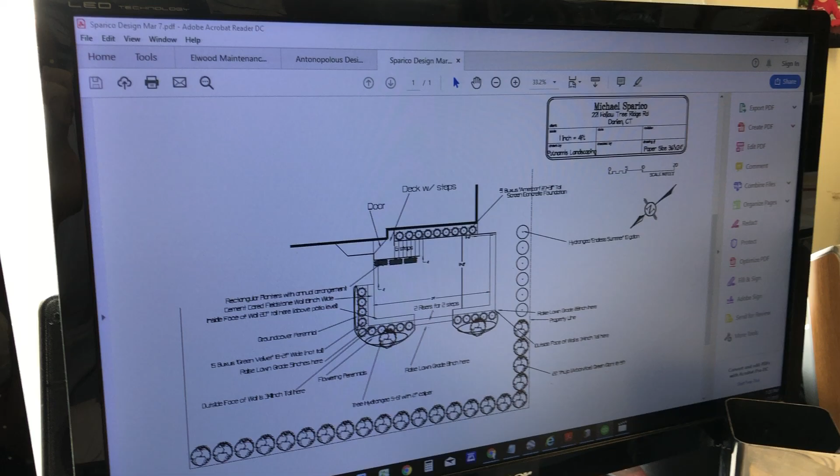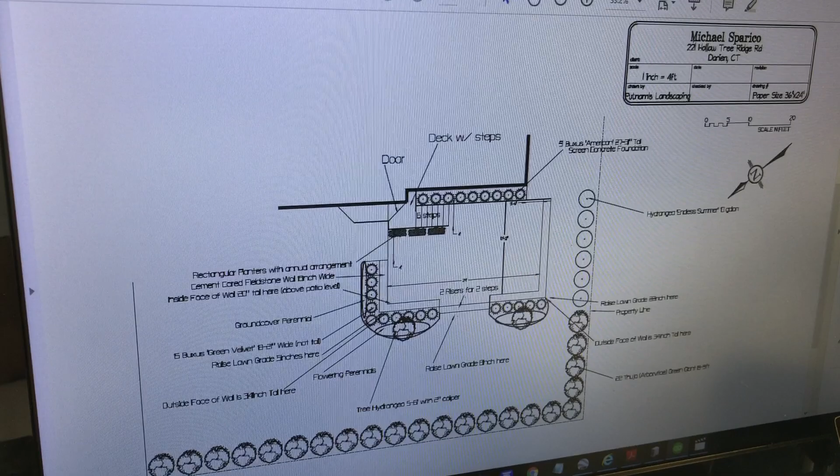Just wanted to go through with the design and quote that we discussed about a week ago. So first thing is I want to talk a little bit about the elevations. So when I was at your house, I have something called a laser level. It allows me to essentially figure out different elevations on your property, and we need that to be able to figure out how tall the walls would be and how high the patio would be elevated off the ground, right?

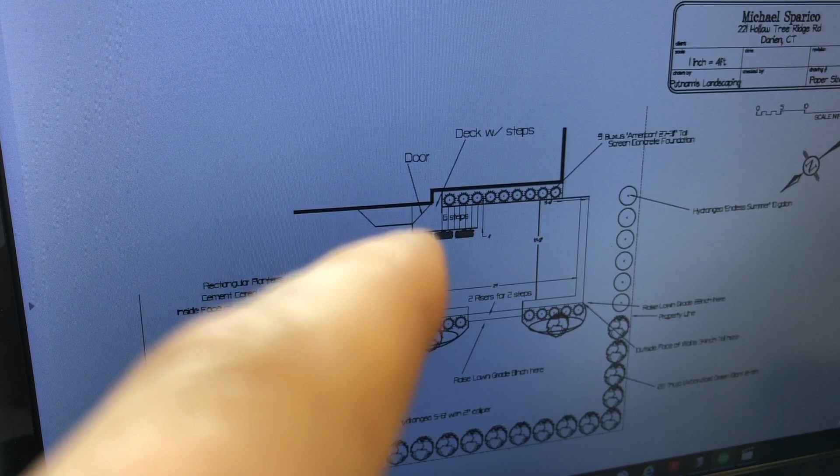So I took my laser level and I used the flat platform of the current wooden deck as my reference point. And when you go down to this corner, which is 20 feet off the house, you're going to end up being roughly 72 inches off the ground. The deck is about 48 inches off the ground level over here, closer to the house.

Okay, so what we do is we need a 1/4 inch per foot for the deck to slope away from the house. So in that situation, you're going to have about 5 inches of slope with the patio. The patio is going to be built ground level, closer to the house, and then it's going to pitch, like I said, a 1/4 inch per foot going away.

So we're talking 72 inches less 48 inches, because the whole patio is going to shift down 48 inches. Okay, less 5 inches the pitch, right? And that's going to give us, let's see here, 72 minus 48 minus 5, 19 inches. Okay, that means that the patio would be built currently 19 inches above the ground.

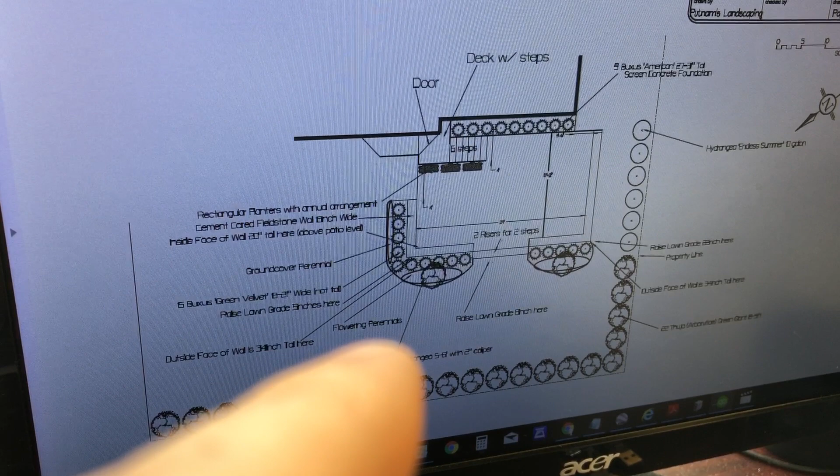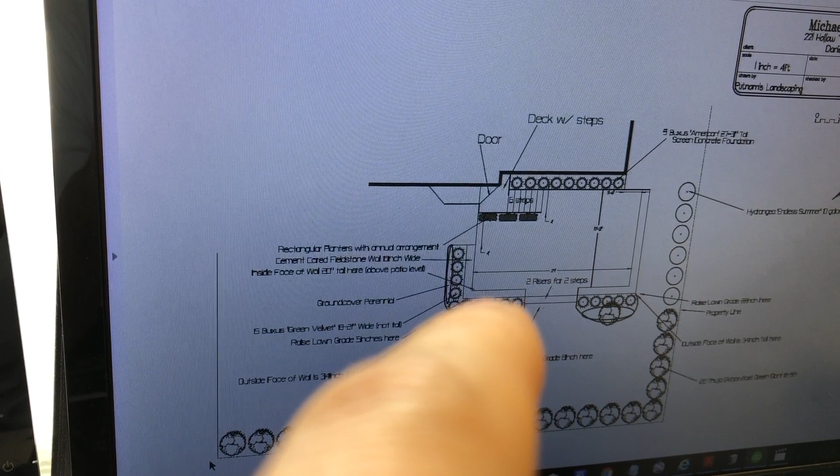But what we're going to end up doing is we're going to end up building up the grade roughly 5 inches. Let me just get this screen back here. Roughly 5 inches in this area. So by doing that, by building up the grade 5 inches here, then we're going to have the outside face of the wall built 14 inches below the level of the patio.

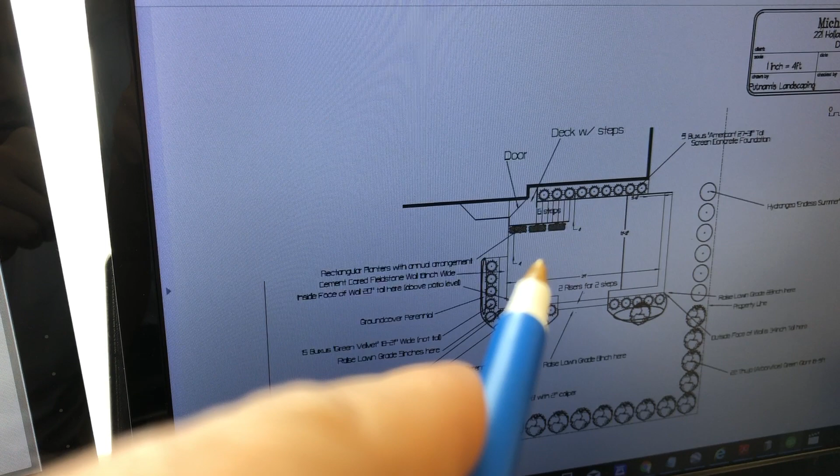The level of the sitting wall, which is this structure here, here, and here, the top of the wall is 20 inches above the patio. So if we do 20 inches plus 14 inches, that gives us the exterior of the wall being here about 34 inches high, which is listed on the design. All right, so again, we're going to raise the grade about 5 inches here, okay, with dirt right up against the wall.

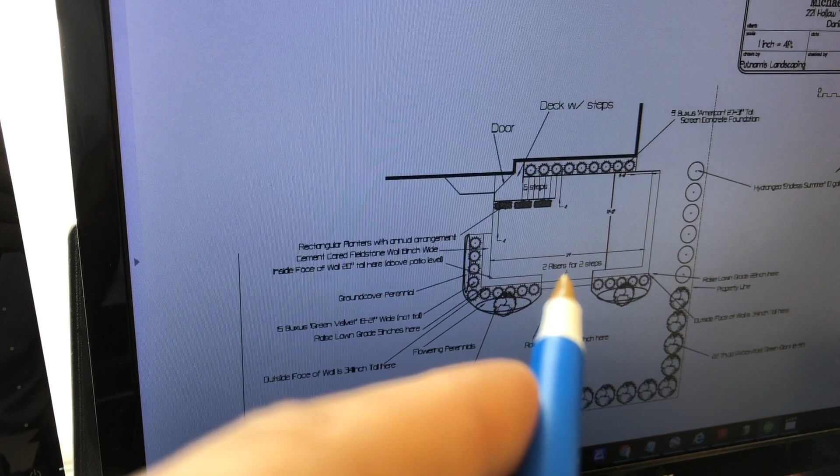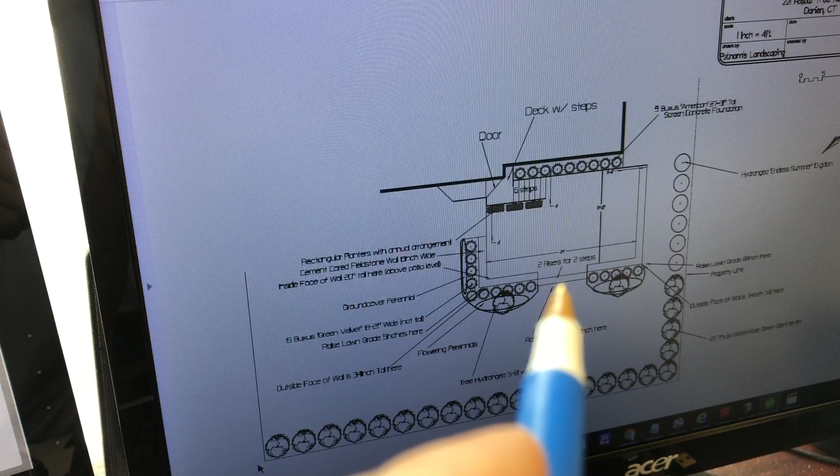The next elevation point was here in the center of the patio, and that was a 75-inch drop, and over here was 89-inch drop. So what we end up having to do is we're going to end up having 2 risers or 2 steps for that 14 inches that we talked about. That's why the wall is 34 inches tall on the outside face and only 20 inches tall on the inside face. These 2 risers, these 2 steps, are going to make up that 14-inch difference, which is why, again, the wall is 34 inches high on the outside and only 20 inch on the inside.

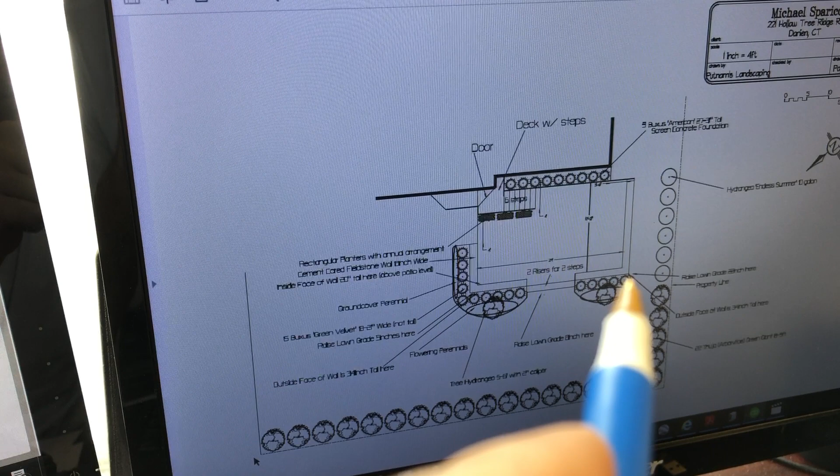All right, which means that in this area, if you run the calculations, the bottom of the wall, when it's 34 inches high, it's going to require us using the excavated dirt and raising the grade roughly 22 inches in that corner. All right, this way, when you're standing here in the lawn, you're looking at the sitting wall, it's 34 inches high along this whole back border on the outside face of the wall.

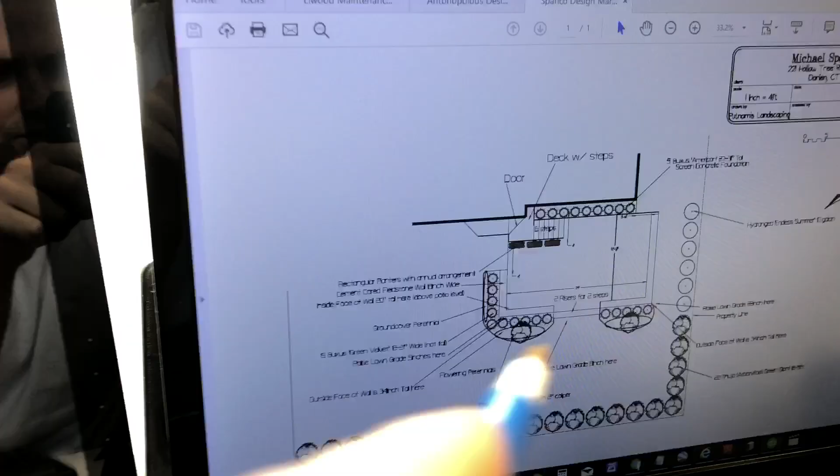That's important aesthetically. Plus, it makes it more cost effective when you're building the wall because you're building less square feet. So the idea is excavate this dirt, utilize a lot of this dirt, build up the grade behind and around it, okay? So again, these are the steps.

These steps make up 1/3 of the linear length, so it's about a 10.5 foot long steps. Rather than going with the typical 12-inch treads, which is like the step material you're standing on top of, I suggest going with 15-inch. All right, so we go 15-inch treads, 2 risers. That gets us from the grass level up to the patio level.

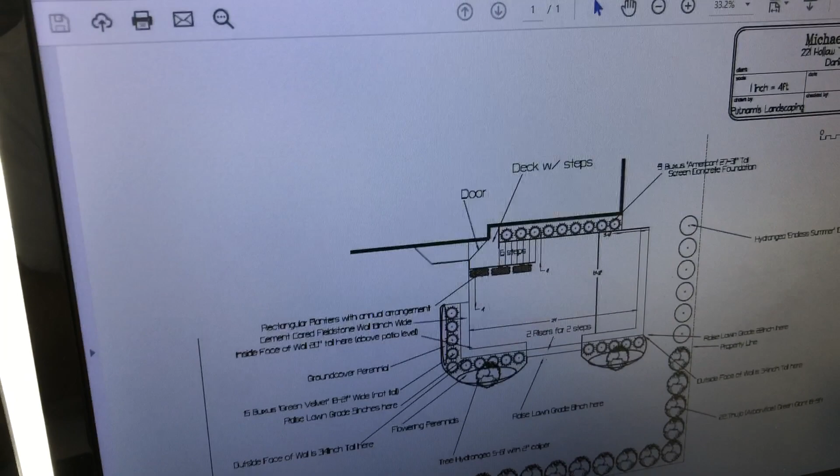Okay, and because we're building all this above grade, we're going to have to bring in a lot of extra process material, which is the compacted material you put underneath the patio. All right, and then this again is all sitting wall, going this way and then going this way. So we have an opening here to walk. If you're walking along this side of the house, you can walk through this area.

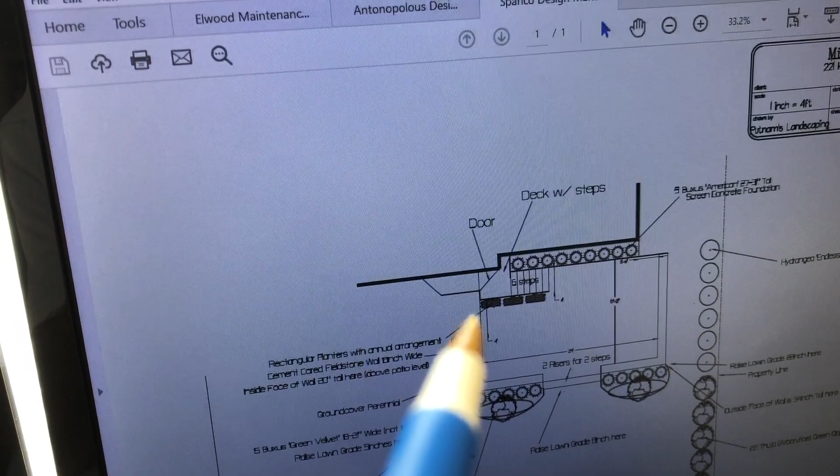It's about 3.5 feet wide. Another opening here, roughly 4 feet wide, to walk on this direction. The steps, you're going to need a platform when you step out of the door because the door is right there. So you're going to have this platform that's going to be at the same level as the current deck, and then 6 steps that are going to take us from this platform down to the level of the patio.

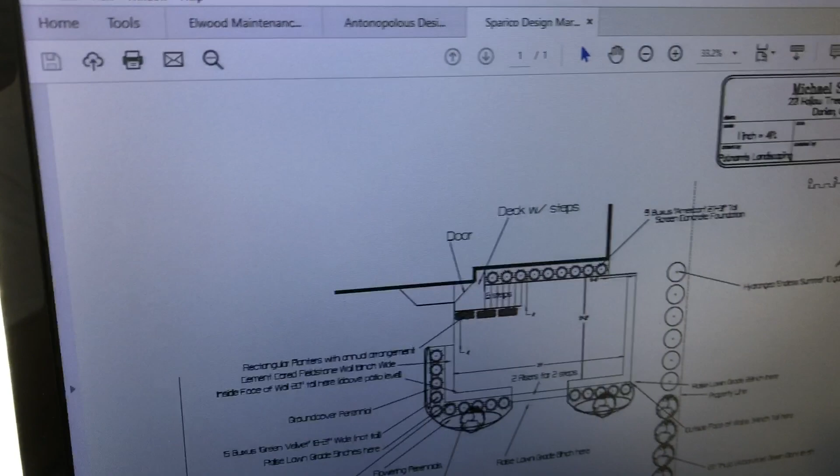All right, each step would have to be 8 inches tall, which is the maximum height permitted when building steps. Okay, I'm not sure, by code, you'd have to make sure. I believe this is 8 inches too. That's something that the carpenter is going to have to check on. So it's something to make a note on, making sure that it passes code, because you're going to end up having to get a permit for this step structure.

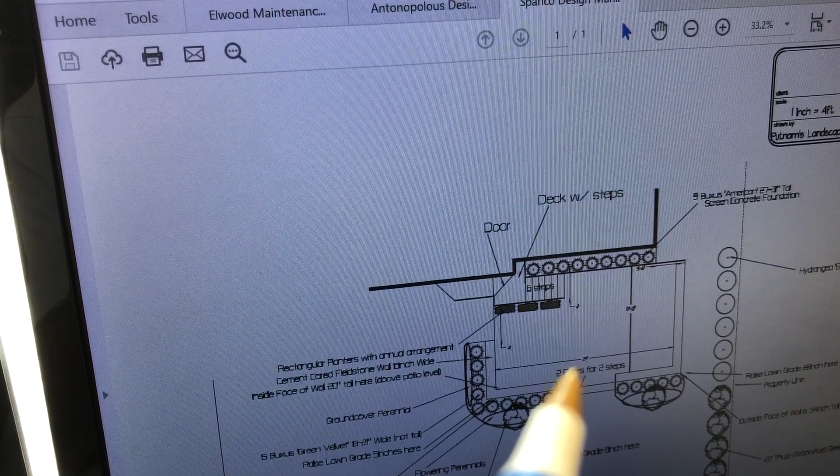The patio you could probably do without. And that's the other reason why I wanted to have the outside of the wall only 34 inches high, because then in that situation you're not above 3 feet, so this whole patio structure won't count as coverage. All right. So that's kind of the idea with the elevations, okay?

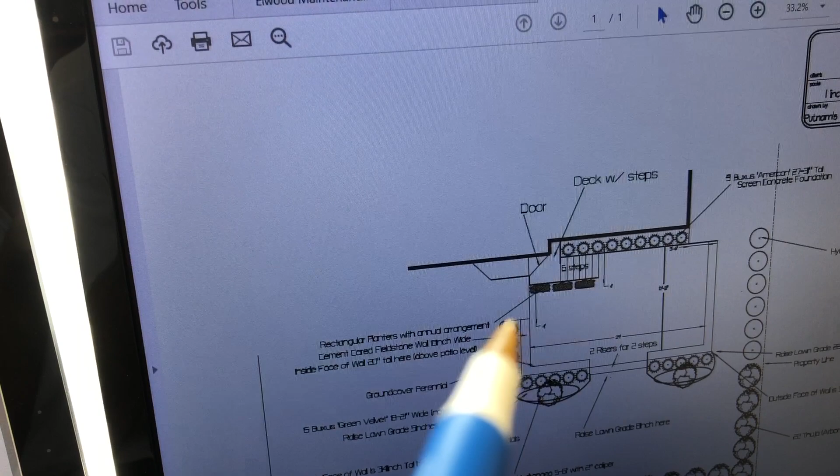So you'll be able to walk flat onto the patio. There's no step here. Walk flat on this way, flat off that way, 2 steps coming down. And then these would act as sitting walls, so you could place a glass of wine or sit on top of it if you're having a lot of people over for a party. But they also act as a functional retaining wall too, because it's going to need to be built above grade due to the slope in the backyard, okay?

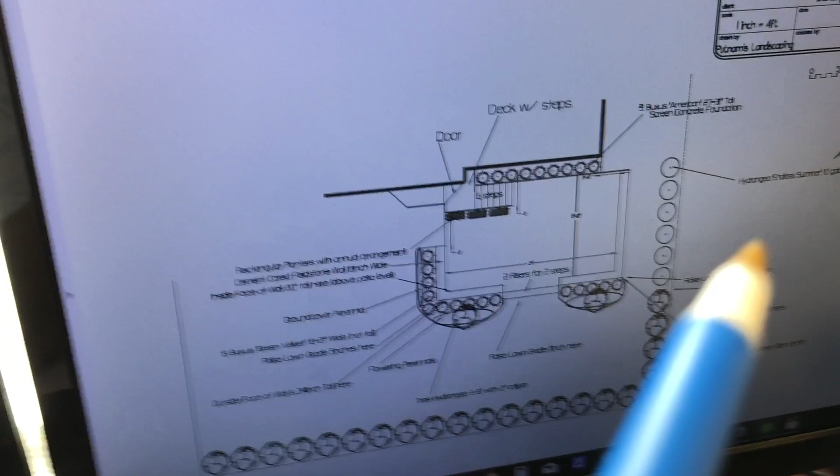I spent the extra time. I said, you know what? If I'm gonna do this, spend the time to think about this, I might as well end up putting in some plantings and screening. There's a house over here where the pen is located, so I have screening trees, green giant arborvitaes, which grow very columnar in nature. They're deer resistant. It's going to require you removing all the trees along your property line now, ripping out the stumps. So that tree work is something you're going to have to get an estimate on.

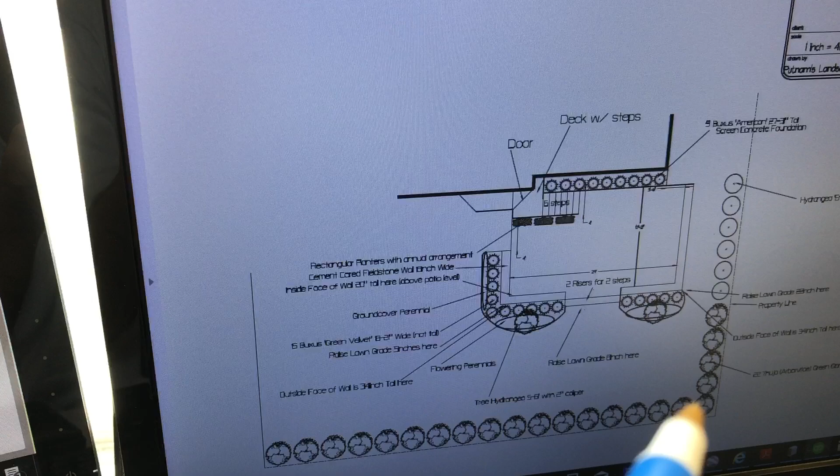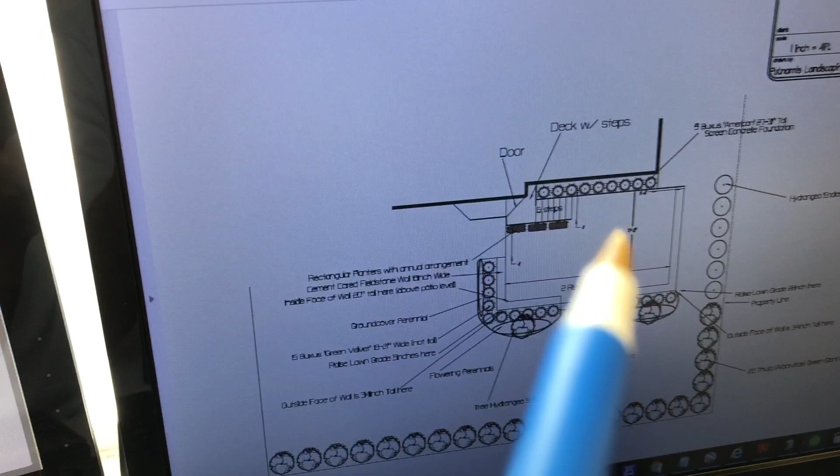I can give you a couple guys that we typically use on a weekly basis. It's something we don't do in-house, but again, we can recommend someone to do it. And the advantage is you do it all at once, then you're not going to have double costs as far as fixing the lawn twice, fixing the irrigation twice. So it might make sense to add these plantings in exterior at the same phase, because you won't be double spending. You'll be more efficient as far as costs go.

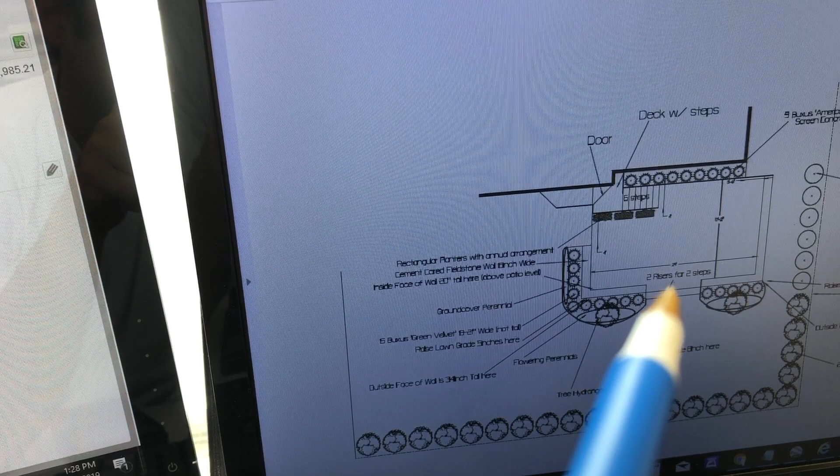All right, I have the dimensions of the patio here, you'll notice listed. If you're going to add lights, I would do brick lights, which are built into the face of the wall. And on the interior of the wall, so I'd do 1 here, 1 here, 1 here, and then 3 on this wall. Then I would also do brick lights within the risers of the 2 steps. So you'll notice I have that listed on the quote.

When you drop this patio down, you're going to have a lot of foundation exposed. So one idea is, if you wanted to, you could have a siding company put the siding down further on the house. The other idea, which I have listed here, is just putting in some evergreen boxwoods along this side, and that would obviously help mask or screen out the concrete foundation of the house.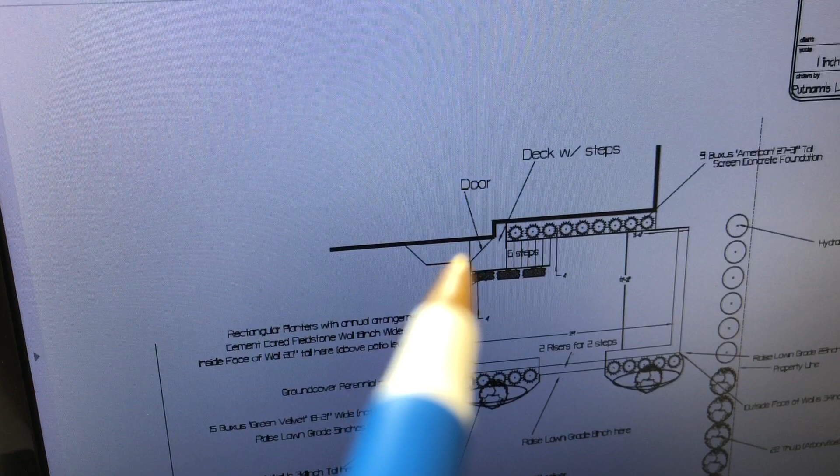When you build the deck, I would say you're going to want to put some sort of lattice going underneath this window, which is actually built above the ground. This is all one window structure. And then around the deck, I would also end up putting in, again, this lattice. So this way you can't see through there and see the foundation. I would consider putting in like an invisible door, so you can use this as storage. We've done that before in other projects.

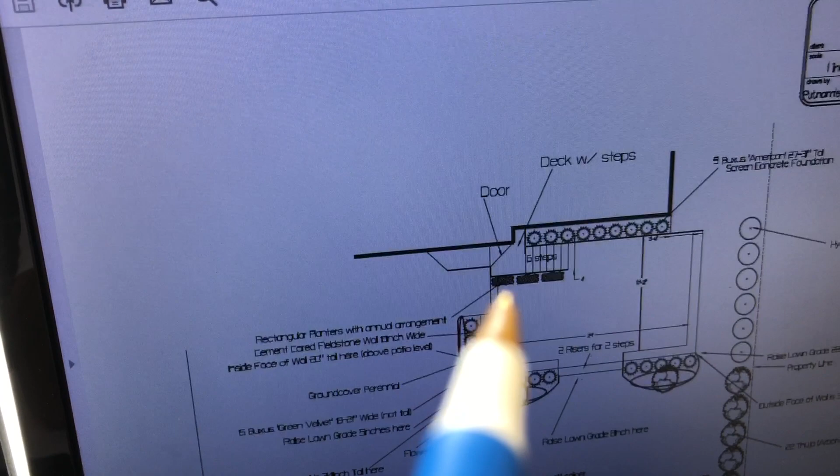And then to kind of soften this larger structure, you'll notice I listed putting in perhaps some rectangular pots with annuals running along the side of the steps to soften the structure, so when you're entertaining out here, you're not just looking at the side of the steps or the side of the lattice. Okay.

So that's it. So I'll shoot this over to you with the estimate, and we'll take it from there. Thanks.